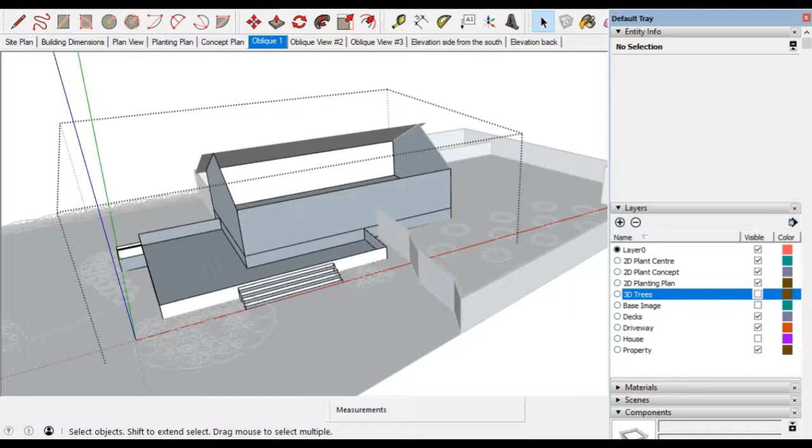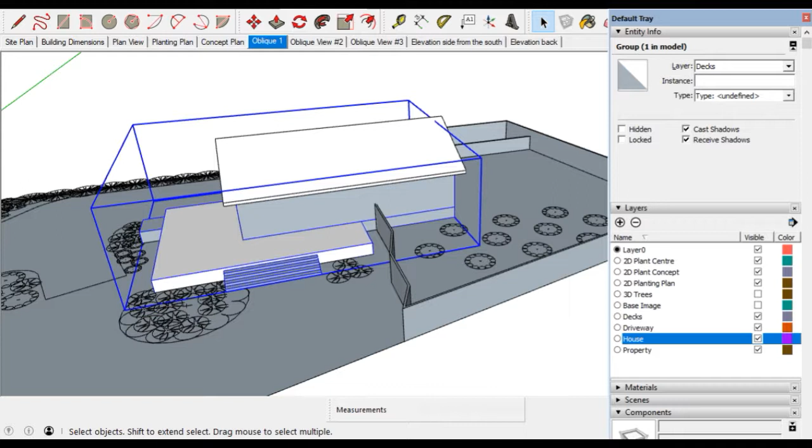In Project A, there are a number of issues I'm coming across fairly regularly, one of them having to do with groups and layers and problems trying to keep things together. What you're seeing on screen is a quick evaluation of a particular project, looking at the different items, the different groupings, groups within groups within groups, and it gets really complicated. So some of them are being exploded, some changed, and then going inside to have a look at some of the entities inside some of those groups and layers.

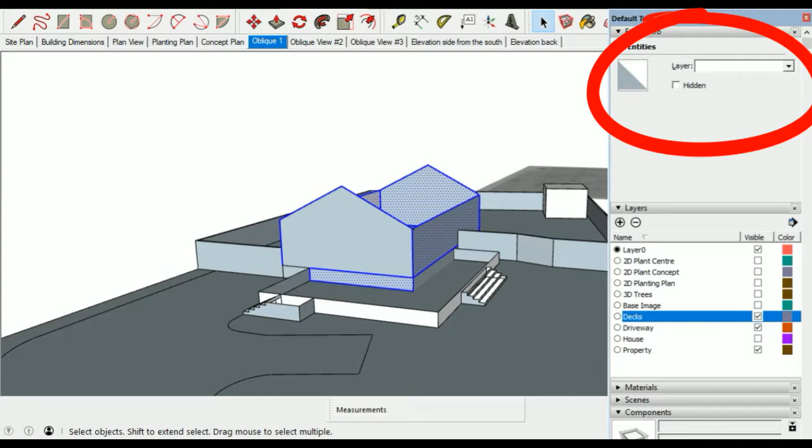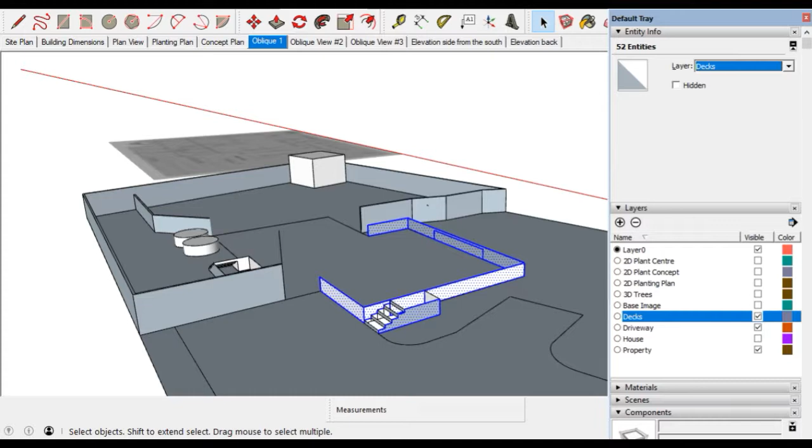Let's make them different. So back and forth on the right-hand side, you see between the different layers, changing entities from layer to layer. All of the house entities, in this particular case inside the group, are going to be on the house layer. All of the deck entities are going to be on a deck layer, just so that they are where we want them to be. It's really more for organization and peace of mind than anything else.

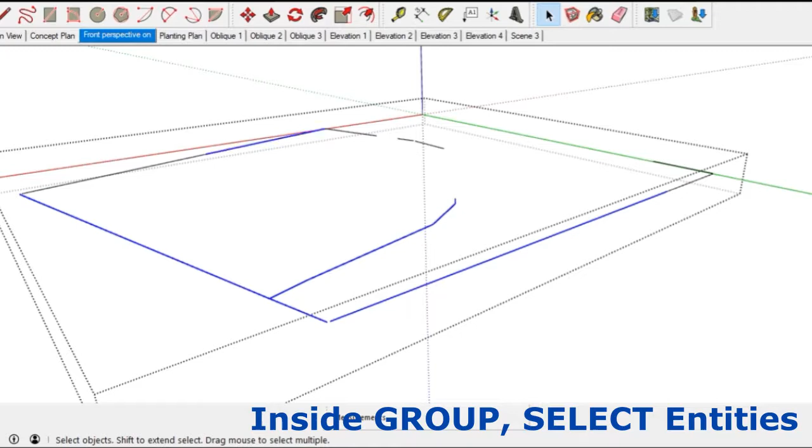A lot of you have tried working with this fence idea, putting in posts and so on, and here there was trouble with the wires. How do you get all those wires on there for a wire fence? A stacked wire fence, I'll call it.

Going to Window, Model Info, Components, Fade and Hide. That gives us an opportunity to see the rest of the model even though we're inside of a group. You'll have to practice that. Windows, Model Info, Components, Fade and Hide.

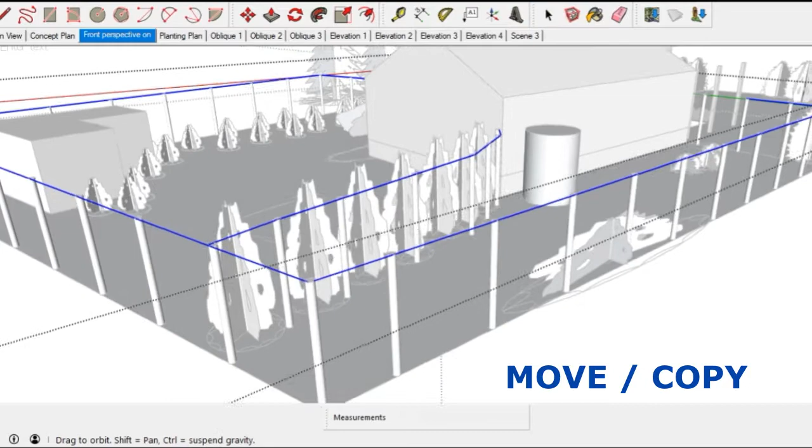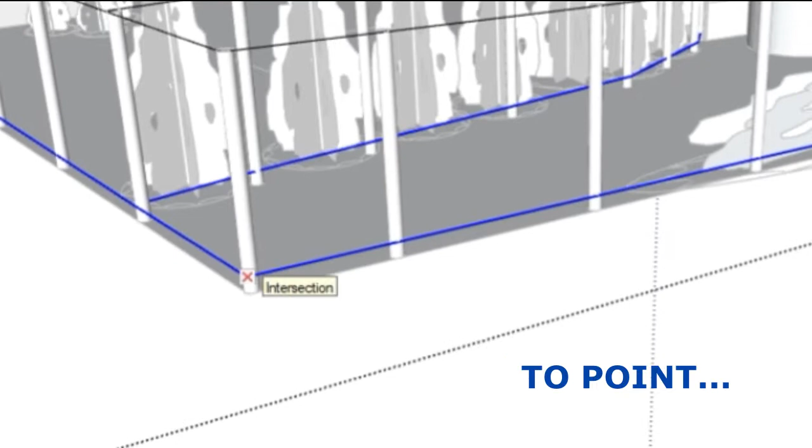Then, because we've selected all of these entities inside the group, we can use Move Copy. We'll give it a from point near the top where it exists, and with copy on, using the blue arrow for the vertical axis, give it a second point. Then we can type in how many iterations we want: 15, so /15 enter, or /25 enter, or /6 enter.

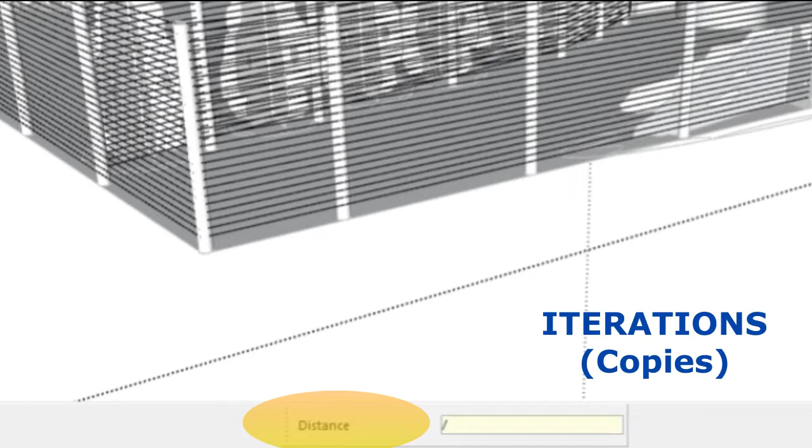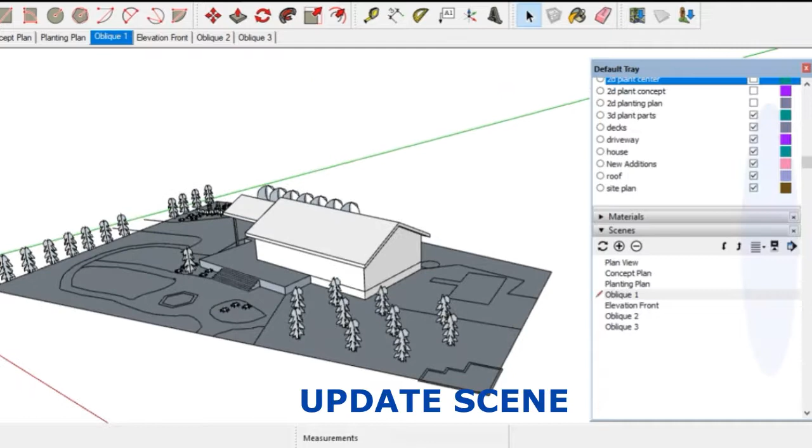A third issue is this whole business of scenes, making sure they're updated properly. Here we've adjusted the layers on a scene, then updated the scene. But I didn't like that actual viewpoint, so I'm going to adjust the viewpoint first, or next, and then update the scene again so that we've got the layers already set.

Then move on to another scene. Okay, I don't like the viewpoint. I'm adjusting the viewpoint, adjusting the layers next, turning off three layers of two-dimensional plant parts, then updating the scene.

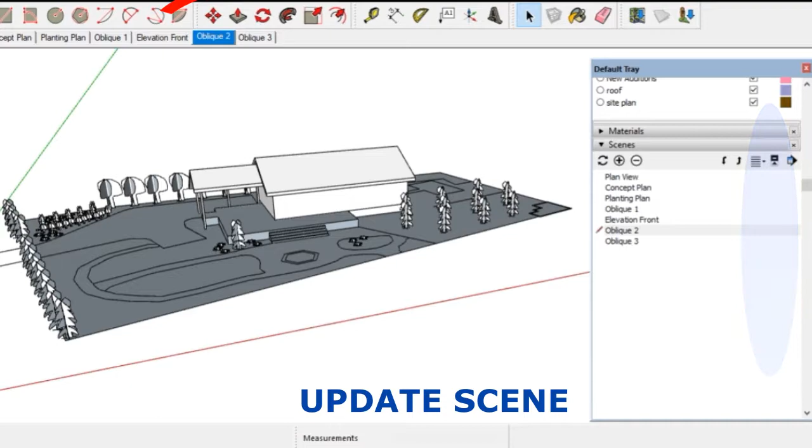The third oblique view is too far away. I want to have it closer, filling the screen as much as possible. So I selected my scene, and now I'm adjusting the viewpoint, adjusting the layers, and updating the scene.